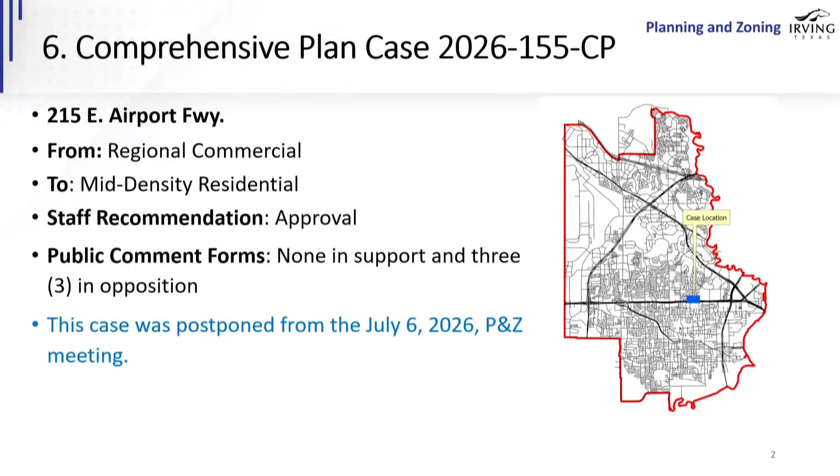So we've done some work and now we're bringing it forward again. This is the subject property, the future land use, which is, like I said, regional commercial currently. The zoning shows multifamily to the north, single family to the west, and commercial to the east. These are the property owners that were notified, and this is the subject property.

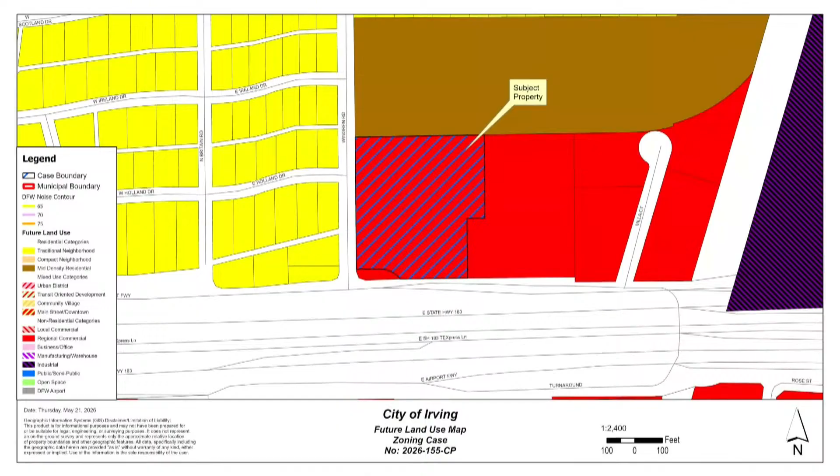And then if you guys are okay, I can go ahead to the 120.

All right, so currently their zoning is SP2 for CC. This was for senior independent living facility, assisted living, nursing home uses, and the State Highway 183 overlay. They're now wanting to rezone it to SP2 for RMF1, the generalized site plan for multifamily residential 1, to allow for low-density multifamily uses, with variances to Chapter 15 for fences, Chapter 33A for setbacks, State Highway 183 overlay for a wall and open space along 183, and section 2 and some of the standards to the 3.13 multifamily development standards.

After review, staff recommendation is for approval. Public comment, same as the comp plan. There was none in support and there were 3 in opposition.

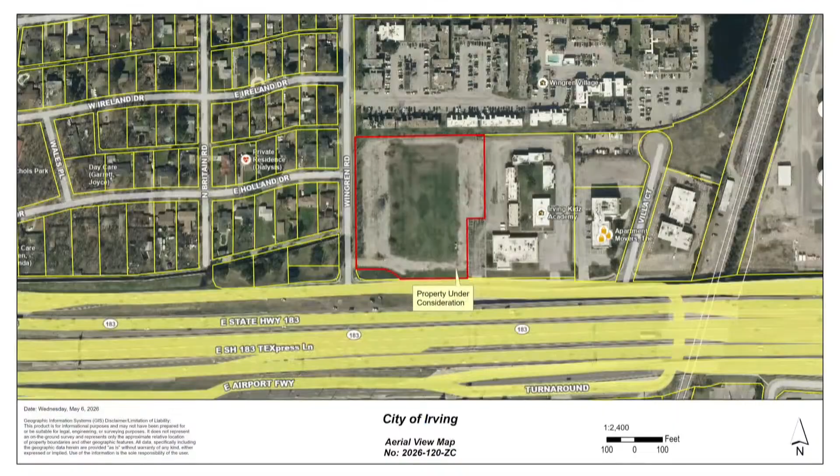Subject property, future land use, zoning, property owners notified. These were the letters of opposition. Most of the concerns - there was one that was about when it wasn't previously notified. There were some concerns about the traffic and congestion. Another one was just about density in general. And the third was about, from the neighbor, about having their easement shown and having access to that easement.

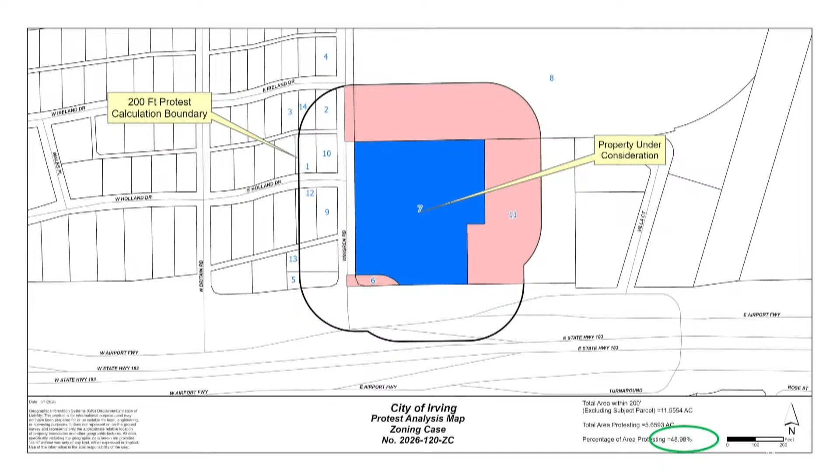Since the last time we were here, there's been a little bit of changes. One is that initially this was kind of just barren, I think initially to be like concrete. We met with the owner and talked about what we'd like to see on the site, trying to get down some of the variances. So they decided to make this kind of a green space area, which inadvertently turned into one of the variances, which I will explain in a minute.

A little bit more green space here. They lengthened their turn-in lane for the stacking that they could have. They lost 2 units, I believe, and they did guest parking here, and then some here, and then some here. They addressed the easement for the neighbor to the east by allowing them to have it here, so they always have access, and it will be gated, but again, they'll have access to their own property.

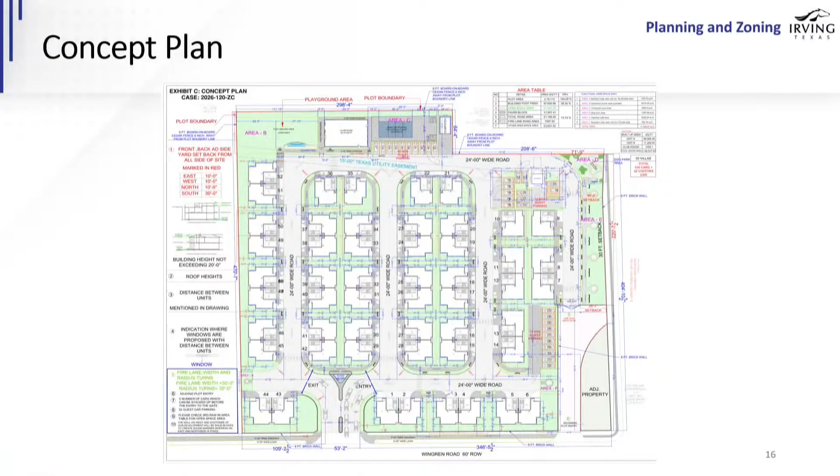And then this is kind of an illustrative Unit A layout. All these are proposed to be 3 bedrooms, 2 stories.

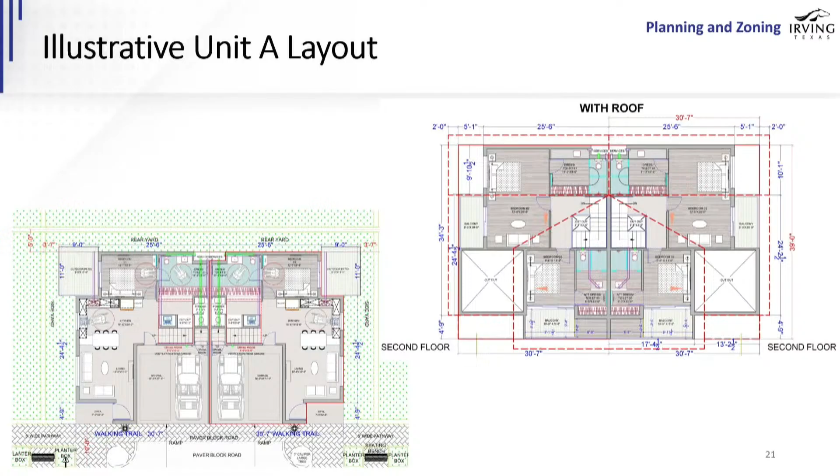And then I can go ahead into the variance requested. Going through the overlay, we realized that 183 isn't mostly for residential. It does talk about high density residential, but not this low density. So that's a use that we're adding to this. That's something that was different from last time.

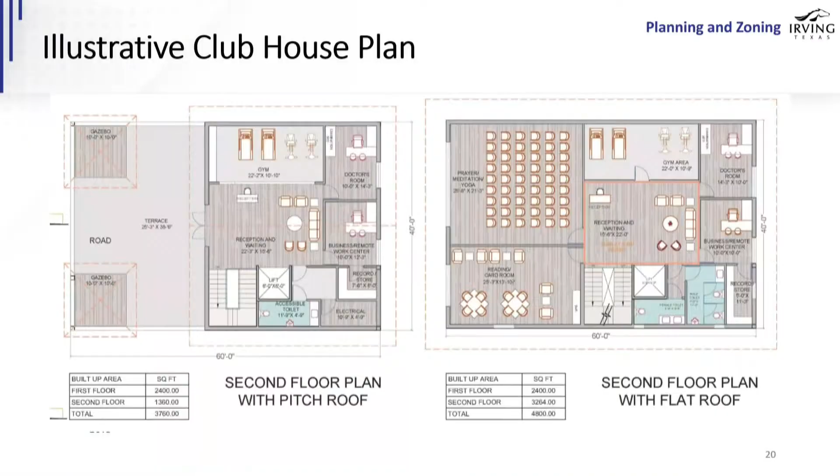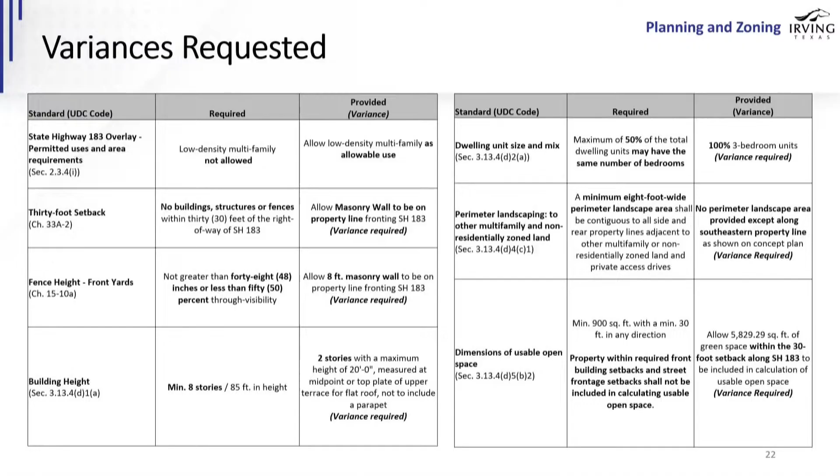Dimensions of usable space, let's see. And then required outdoor amenities, sorry. It looks like they're providing everything besides the swimming pool, the walking trail instead of being more continuous. They are in that buffer that's now to the south of the property that fronts 183. There's a little bit more of an actual sidewalk strip that's landscaped. But besides that, it's just the sidewalks that are in front of the units.

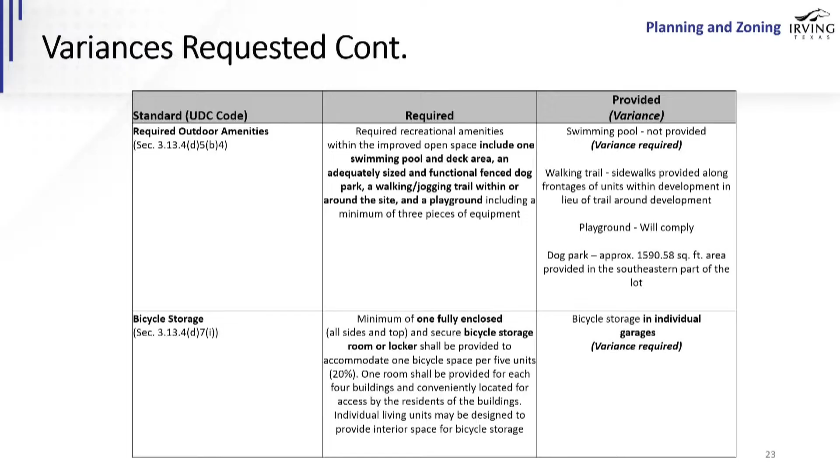They did, from last time, increase the size of the dog park, which is also gated. And then the bicycle storage - they're providing storage inside the actual individual garages, but since it's not necessarily our standard of having a room for so many units and that stuff, it's still a variance.

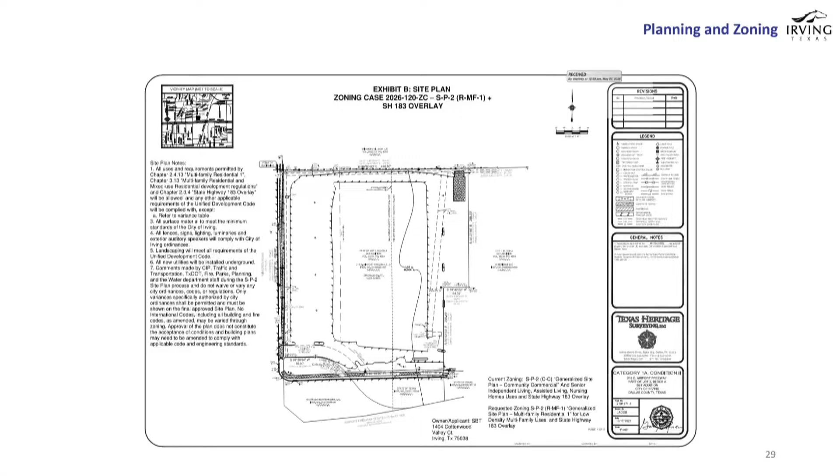Are you all satisfied that you got enough information to really have a firm sense of what the variances are? Yeah, we had them actually quantify in terms of what trees are required, what trees are provided. And that's why we got that list - even though it's still technically long in terms of what variances you usually see per case, it's a lot less than what was initial, and we have concrete numbers now.

You okay with it? Okay. So we've answered all the concerns of the commission basically by your drawing that was at our last meeting, as far as parking, as far as making the variances more visual and understanding what we're changing up. So commission, is everybody pretty much okay with it?

Just want to make super sure. This part right here is the adjoining property and this is their easement to access that. And along Wingren, is that going to be gated? Yes. So it'll be gated on both the east and west ends of that? Yeah, so this is where they're - no, I'm sorry, just on the easement, so who will provide him access when he needs it?

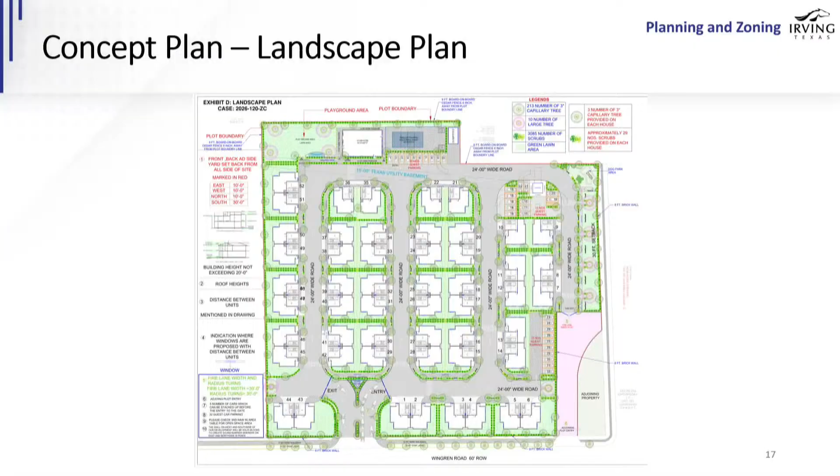So it won't be gated on Wingren because that has to be open. But you can see a little further back it actually says the word fire lane, so it is gated there. That's part of the shared access easement - it cannot be closed off from the other. And there's no landscaping there? No. And there's no building on the actual property that Mr. Kachechian owns - I don't think I said his name properly - no, it's zoned CC, so it's their prerogative to do with it as they choose.

Okay, I'm good, thank you. With the SP2 plan, the generalized site plan, they will have to build it exactly as they're showing here - is that correct? That's what the concept plan shows. The SP2 designation is usually based on acreage, so since it's more than 2 acres, that's why it's an SP2. But with multifamily, we require a concept plan, and that's the enforceable part. So if it's for future redevelopment, they would just have to come back and get a whole new SP2 more than likely? Okay, thank you.

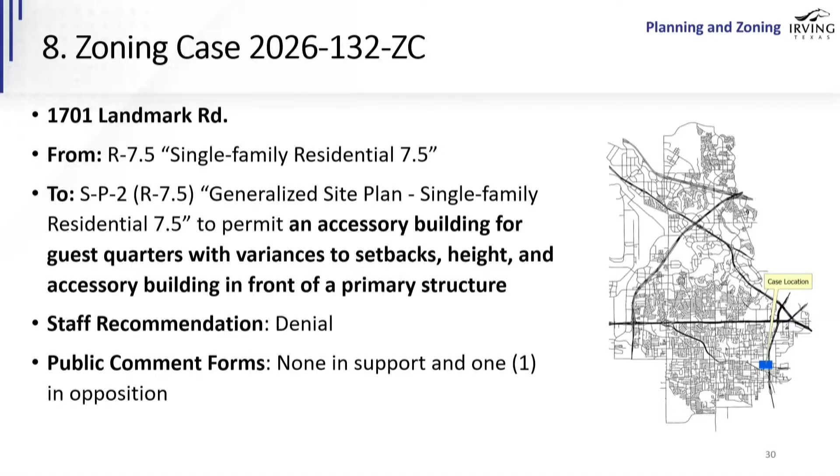All right, so this one is at 1701 Landmark Road. Currently their zoning is R75, single-family residential 7.5. They're going to rezone to the generalized site plan for R75. This is to permit an accessory building for guest quarters, with variances to setbacks, height, and accessory building to be in front of the primary structure. After review, staff recommendation is for denial. In terms of public comments, there's been none in support and one in opposition.

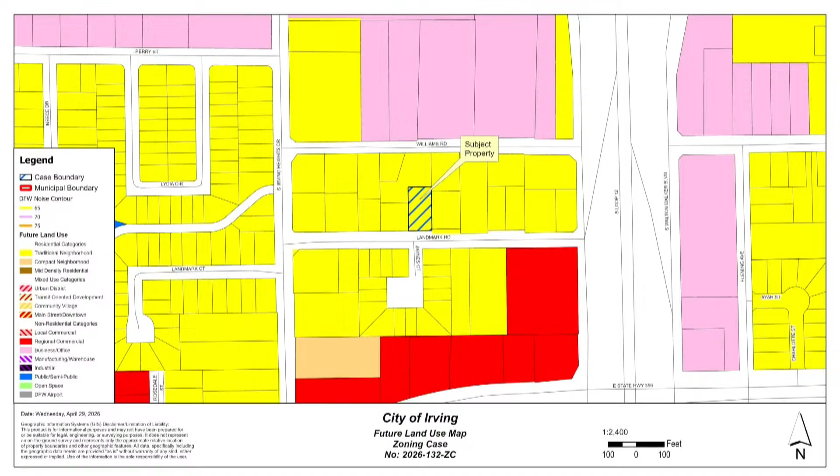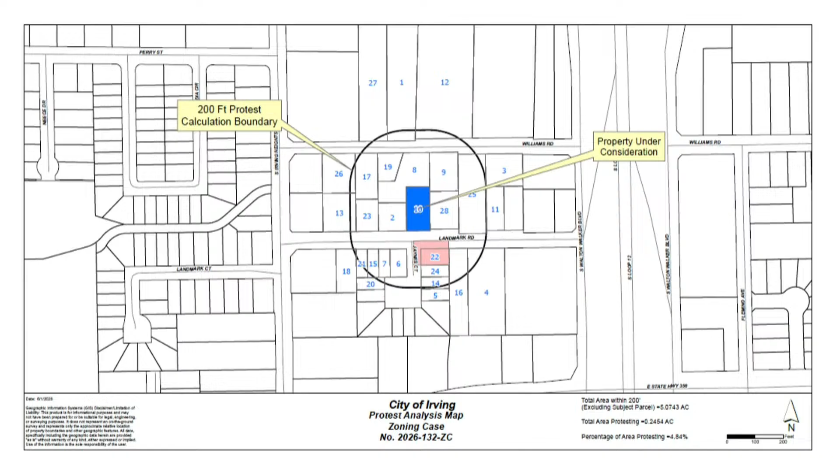So this is the area where it's located. Future land use, which is that traditional neighborhood. Zoning - all around it is single family, but we just have a little bit different designation: some 0 lot lines, some R75, some R6. These are the property owners that were notified, and you can see number 22 is the one that submitted their letter of opposition. Again, it has to do with density, mostly their complaint.

So how this came to be: in May 2025, there was a code enforcement violation for rental of a detached two-story structure. Initially it was a two-car garage converted to be habitable. It was initially under the STR, short-term rental designation. The owner said they weren't doing short-term rentals under 30 days, but longer rentals, so code enforcement closed that case and opened a new one, also in May 2025, for the conversion of the garage to a habitable structure.

It looks like there were no permits for any of the work done. There was a Zillow listing from around 2019 showing it was already two stories, but at that point it seemed to just have a wet bar and an open room, which is allowed for detached garages. But we noticed they got caught because code enforcement found they were listing it on Airbnb. Throughout the cases, it was noted that they should take down the advertisements, but as of at least a week ago, when I did this report, the ads were still active on Airbnb. I can get into some fabulous photos in a minute.

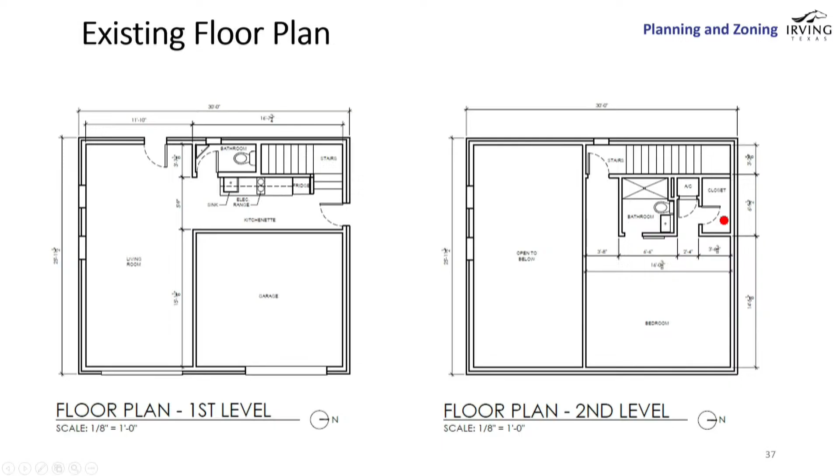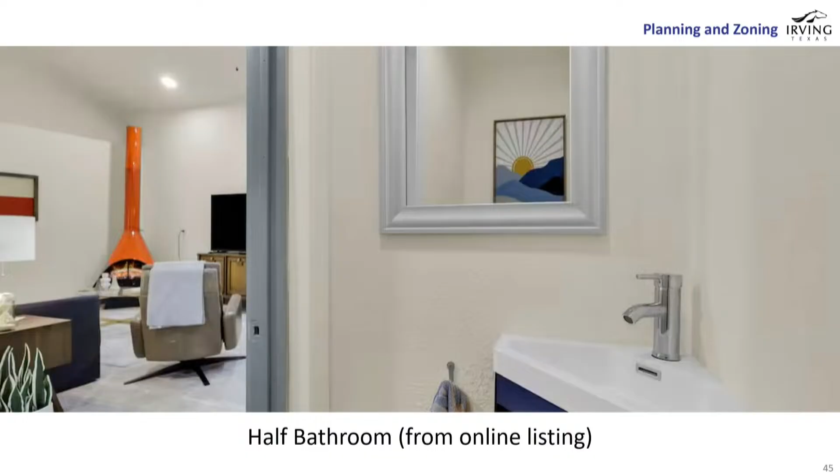So what I'm showing you now is from what you saw on the Airbnb website. You have the living room, and this little dining nook area. This is kind of the half bath—they didn't really have the best photo showing where the toilet is, but it's there. And then this is their kitchen, so you can see it has the refrigerator, microwave, cooktop, and sink. Then you go upstairs, and there's the bedroom. I believe this is the closet, and the bathroom is over here.

And I'm open to any comments or questions.

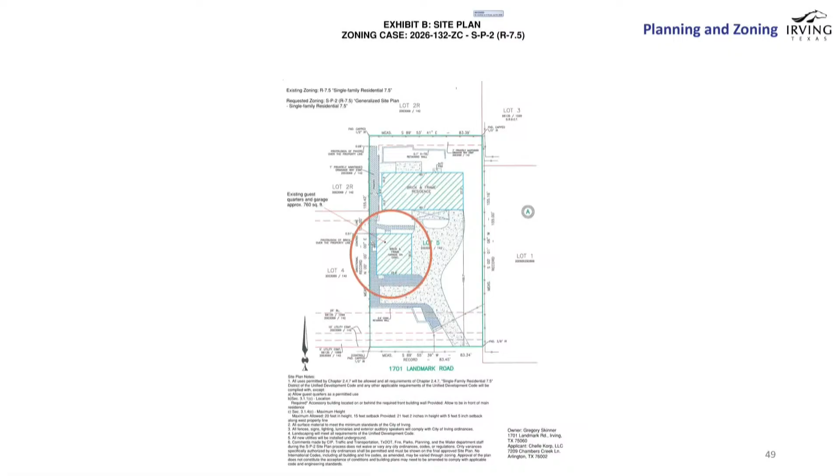If this is denied entirely, what do they have to do? If it's denied entirely, they'll have to take it back to a detached garage. That's not a problem, even though they stopped using it that way. When they built the house in 2004, they did get permitted for a detached garage and the home. Unfortunately, there was no construction plan, so we couldn't see where the intent was, but as far as I could look back, it's been there. So they're still permitted for a detached garage, and that hasn't lapsed.

So they would have to take out everything that's habitable and obviously not have it listed—just the kitchen, or take out all of the restrooms and everything? The dwelling accommodations—for detached garages you can have a loft area, but I believe our code specifies it can't be AC'd. So you'd be taking out the bathrooms, you'd be taking out the kitchen, and you could have the rooms, I believe. At that point, it looks like they converted this, because this used to be a two-car garage.

Do we know when they put this all in? Between 2019 and now—when we looked at the Zillow listing before it was sold, it was just kind of a garage, and upstairs had a loft with wood floors, and it had almost like a wet bar, a sink, and a countertop. So it's been a lot of changes since then.

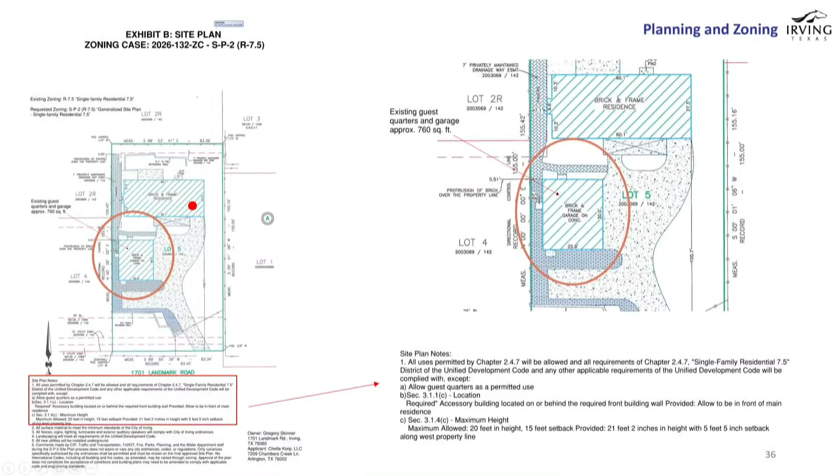Does it mention any problems with people parking on the road? That doesn't seem like a good road to park on. No, there was a fair amount of driveway inside the gate. Yeah, that's the one thing the site does have—they have this drive here, and they could have parking here, they still have a parking space here, and then the actual main house has a garage as well. So you have all this space, but no, it didn't talk about noise or parking or any of that. It just said they didn't want the density.

We will print the opposition for you and have it for the hearing. Great, thanks. So what you were saying earlier is that they want to use it as a guest house, but yet they still have it on Airbnb for rent. Correct. Okay, thank you.

Have you sent it? I haven't sent it. I don't understand how we can allow it as a guest house, even if it's not on Airbnb, when anybody else who's come to us wanting to build a mother-in-law house or suite, it had to be attached to the main building. So why is a guest house permissible without an attachment to the main building?

It's not unusual to have them detached. The difference is it functions kind of like an extension of the home. It's just physically a separate building, but whoever is staying in that building has to be functionally attached to the family. It has to be someone who can come in and go to the kitchen, come in and watch the football game. It has to be someone who is an extension of that family.

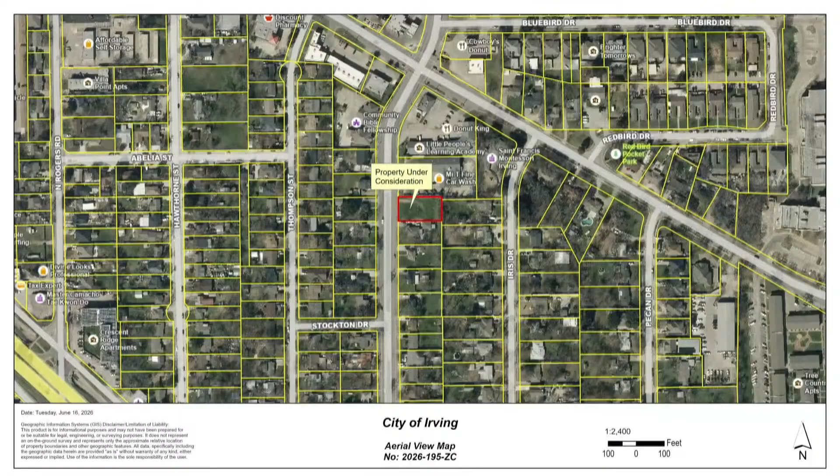2026-195-ZC. Yeah, so this one's on 526 North MacArthur Boulevard. We are requesting indefinite postponement. It seems when, after talking with Carolyn, we initially thought we could take it outside of the site plan and just rezone it since it is on separate lots, separate ownership, but we were told that they need to be part of the rezoning process. We need to amend their site plan for the car wash that's to the north, and this is a subject property, and then their neighbor right here, which is that Mighty Fine car wash.

So when the site plan was originally done, it included this, and there was supposed to be some kind of structure here. Well, anyway, they never built it. They sold it, and now the new owner is wanting to put a duplex on it. But after we talked with Carolyn, it seems like we need to re-notify to include both lots, and also we need an owner authorization form from the owner of Mighty Fine Car Wash to have his site plan amended. So that's why we need to postpone this.

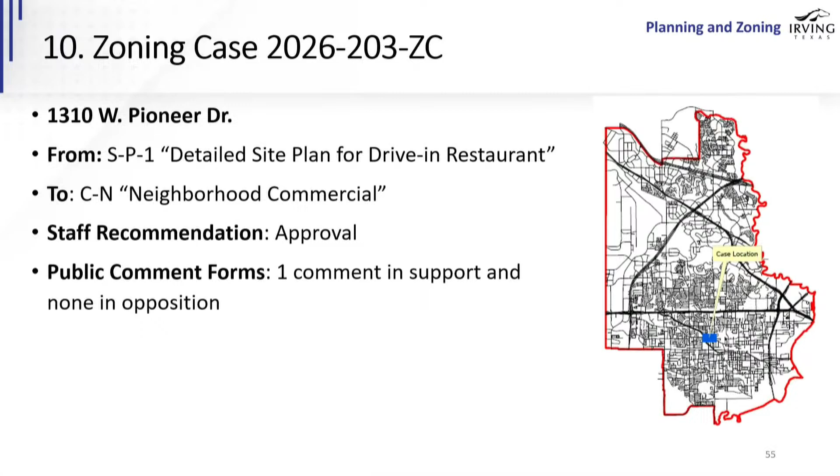So zoning case 2026-203-ZC, 1310 West Pioneer Drive, a zoning request change from SP1, detailed site plan for drive-in restaurant, to commercial, neighborhood commercial. After review, staff recommends approval. And for public comment, 1 in support and none in opposition.

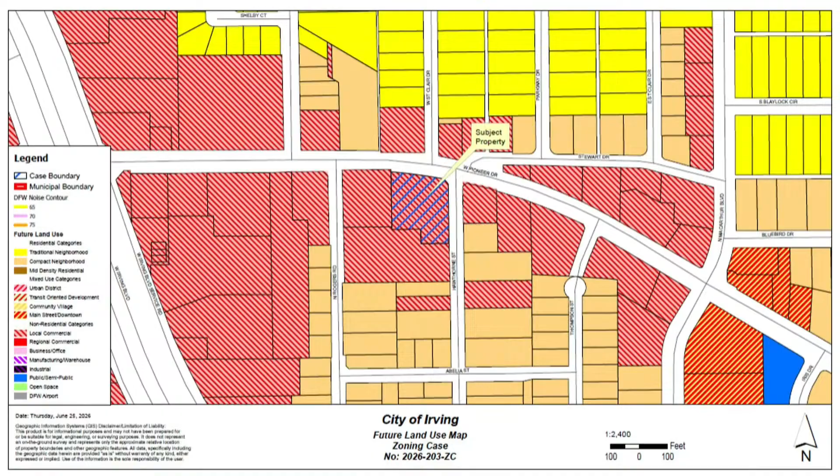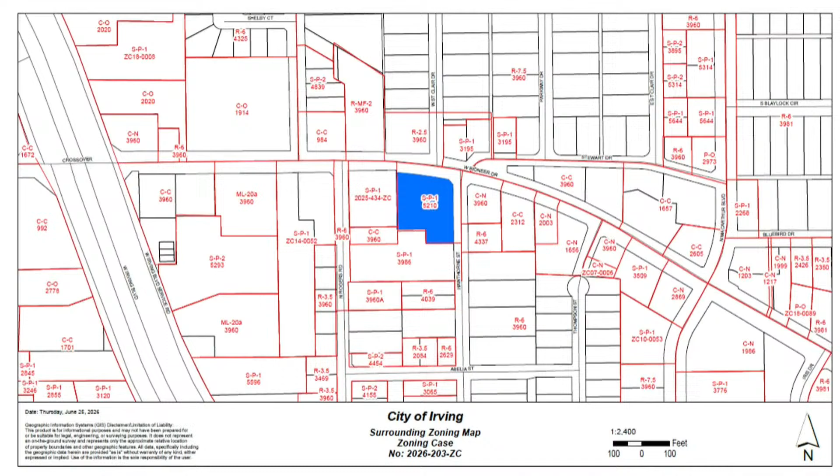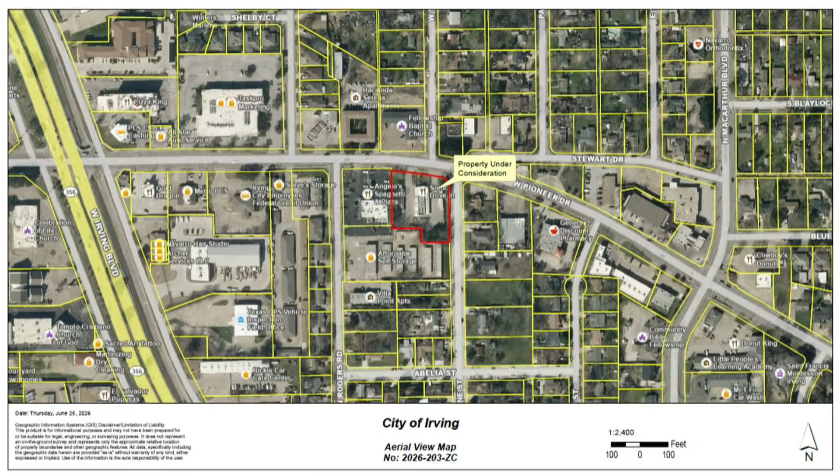Unless another drive-in restaurant were to come into this property, this building will remain vacant. And the applicant does want to convert this space from a drive-in restaurant to a dine-in restaurant, and with the change in zoning, that would allow for this use. And then it already complies with CN regulations for this space, and I also did want to note that we did see that letter of support that really is eager to see change in this property right here. And I'm open to any questions.

It's kind of a full circle moment for us because one of our previous commissioners was the original owner and developer of the Sonic. So it's kind of nice to see that it's moving into something.

I have a question. When I drove around and inspected it yesterday, it is dilapidated, and in the back, all the wiring has been stripped out. Is there enough room? Because before it wasn't a dine-in. Is there enough room inside to really make it an inside diner?

I'm just curious. Well, we didn't receive a site plan or what the restaurant will look like in the future, because there's no requested variances and this is just for a zoning change. But as far as we know, the regulations do support a dine-in restaurant. It's a great improvement from where it stands now, but it's supported.

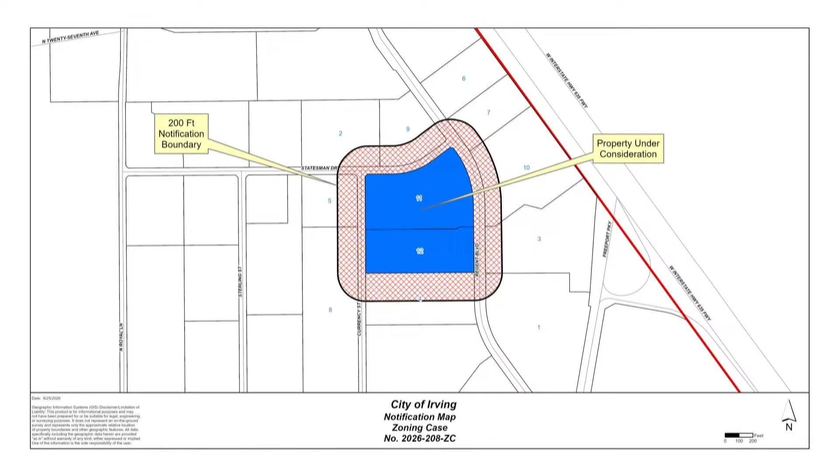A little bit of the history of the future land use of this area. Prior to 2023, it was all lumped together as business district. When reconsidering this area and splitting the definitions from business district to manufacturing warehouse and business office, staff recommended to bring this entire area to manufacturing warehouse. In the end, it was decided to split it up, with manufacturing warehouse to the south and west, and business office taking up the majority of it.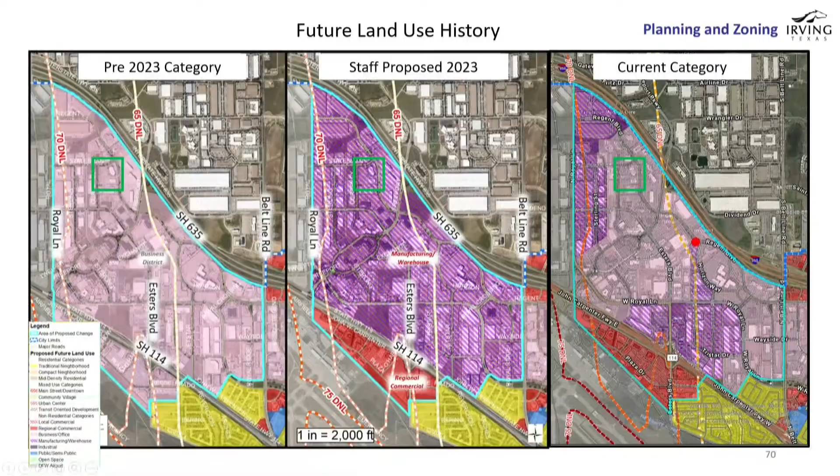And once again, the future land use map. As an additional note, we were informed on July 30th that the property may be under a private deed restriction preventing warehouse and manufacturing use. However, the city does not enforce private deed restrictions, and staff cannot confirm the status of the deed restriction.

Following market-driven trends in the area to redevelop office parks and warehouse distribution facilities, and the existing zoning entitlements of most of the area allowing for these more intense uses, staff supports the requested change to the future land use map to manufacturing warehouse.

On to more of the zoning aspect of it. Once again, going from commercial office and ML20A to just ML20A, we recommend approval, and there are no comments in support or opposition.

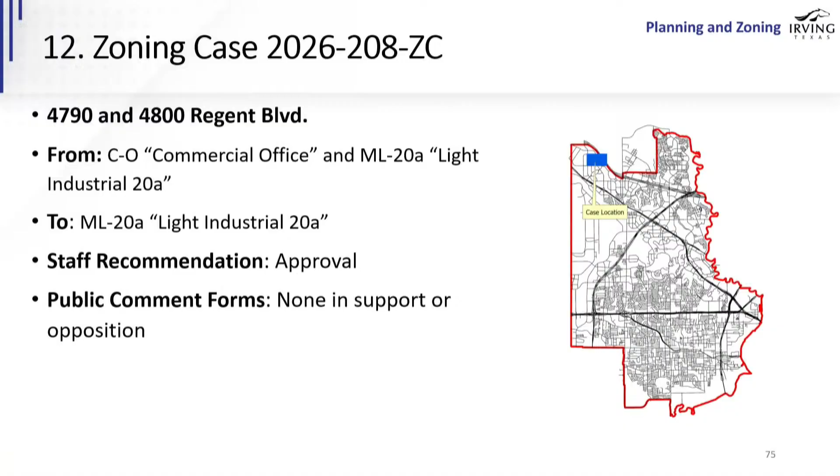The property to the north has a two-story office building on it currently that was built in 1993. The southern property has a two-story office building built in 2008. In the applicant's letter of intent, they wish to preserve the current office uses while allowing for the potential for light warehouse and light industrial uses.

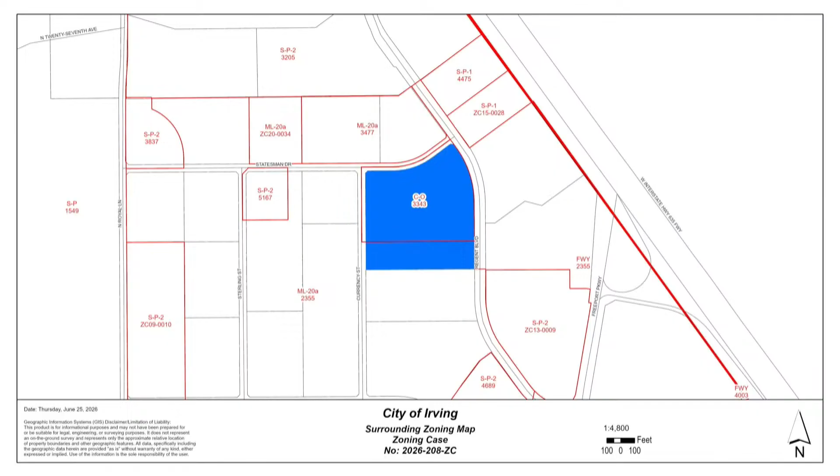Future land use map again. Current zoning again. Notification map. Surrounding zoning of the larger area. Breakdowns of CO and ML20A.

Here we have the northern parcel, 4800 Regent, from across Regent Boulevard, and the other side of the property from the parking lot. Here we have the southern property, 4790 Regent Boulevard. Across the street to the north, to the east, to the south, to the west, and back to the aerial view.

Many of the surrounding properties have zoning entitlements for freeway and ML20A, and over the last several decades have become a mix of low-rise office parks with some warehouse distribution and light industrial uses. Perhaps due to the proximity to DFW Airport and changes in the office market, the city has received inquiries regarding changes to properties, and permits for demolition and construction of warehouse and light industrial properties have been submitted. The existing freeway and ML20A districts do allow these by rights.

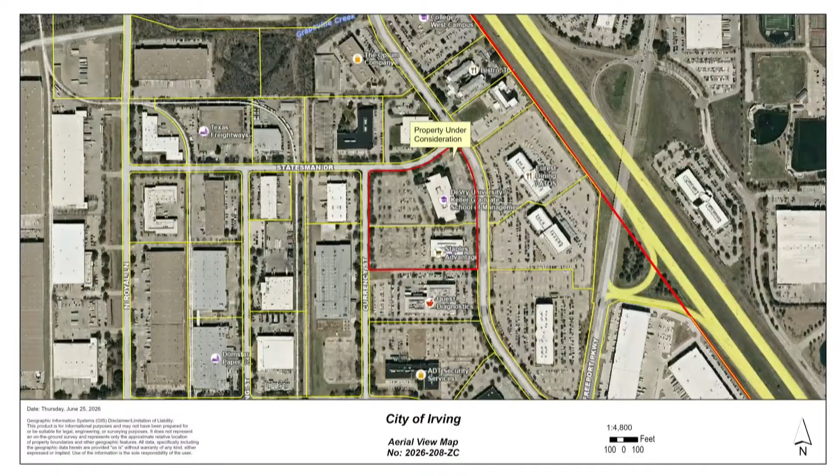The property remains zoned CO commercial office in the center of an area where surrounding properties can redevelop with no rezoning processes or considerations necessary by the city. This creates an inconsistency for the potential of the properties to develop in the same future pattern that other properties currently enjoy. Considering that the sole property remains zoned for offices in an area where current zoning entitlements allow for light industrial uses, and the consistency of the area and compatibility of adjacent land uses, staff supports the requested zoning change. Any questions?

Is this going to be sort of a flex warehouse type application, or what kind of development are we talking about? I believe the southern property has one company in their office building that is hoping to develop a warehouse nearby, so it would be a joint operation.

Right now, the owner intends to keep the buildings. They just want to change the entitlement to give them options in the future. So there's no plan at the moment.

So right now, are they wanting to keep basically the same facade and maybe open up the back for storage, or are they wanting to tear down? Are we going to have metal buildings there, or a tilt wall flex warehouse?

We were told there's no plans for the northern property at this time. It will stay as an office building. There's a tenant in there. I think they recently purchased it, so they just wanted to have the same entitlements that the properties around them have. But they don't have any plans, nor a schedule. They just want the ability to do it if they have a user.

I don't see an issue with having a flex warehouse there or whatever. My concern is that the tenant moves out of the top building and they go to the back and build a big metal building. It's really inconsistent with what's around.

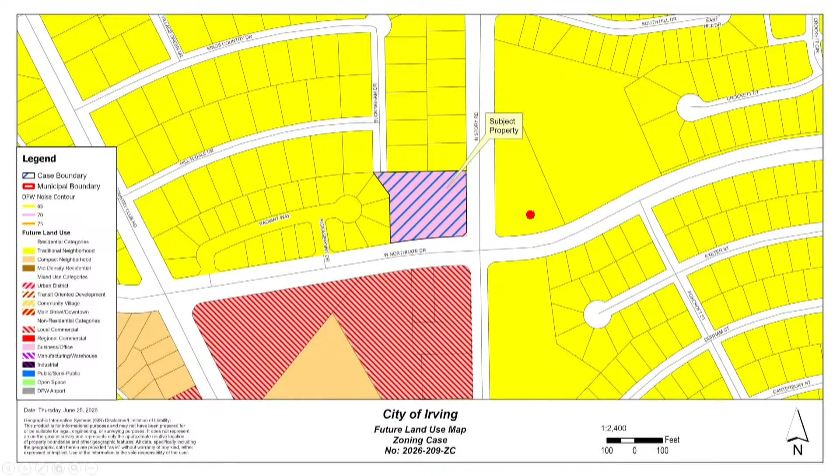It is located at the corner of West Northgate and North Story Road. The current SP2 allows for the PO uses within the subject property and then R6 in this undeveloped area over here. The future land use is business office on the subject property and traditional neighborhood to the west, surrounded by other traditional neighborhood to the east and local commercial to the south.

Current zoning, notification map. This is the subject property across from West Northgate, looking down from North Story Road. This is to the north, to the east, and to the south. And this is down to the west where the rest of the undeveloped residential is.

Also in the site plan is a request, the original site plan, for a front setback variance, which would not be needed with the requested rezoning. In the applicant's letter of intent, they state that the owners want to construct a building for neighborhood-serving commercial uses such as retail, professional services, and a small restaurant.

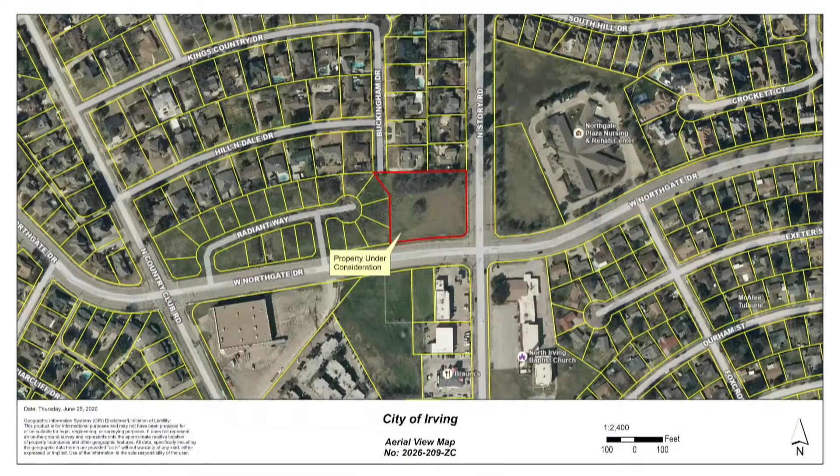Given that CN is a compatible district in the business office future land use, and that the site's location is at the intersection of two arterial roads and adjacent to CC community commercial zoning to the south, with non-residential uses to the east, staff can support this request. Any questions?

Looking at the map there, on Story Road, for the small businesses like a restaurant they've requested, that slope is so dramatic I can't imagine anything you can put in there. I didn't know from what I read and saw if they were going to build to the west, down in the small area, or if you're talking about the corner there. I guess that's a question we'll have to ask them. Yeah, I'm not sure that we've received building permits for it.

Anyone else have any questions on that? Any other questions? Doesn't appear to be. Tanner, thank you.

And you have the final case tonight. 2026-211 SFP. Yes, we're looking at a special fence plan request at 614 Lexington Drive. The current zoning is R7.5, and the request is for an 8-foot tall solid wood fence within the 15-foot side yard setback of a reverse frontage lot.

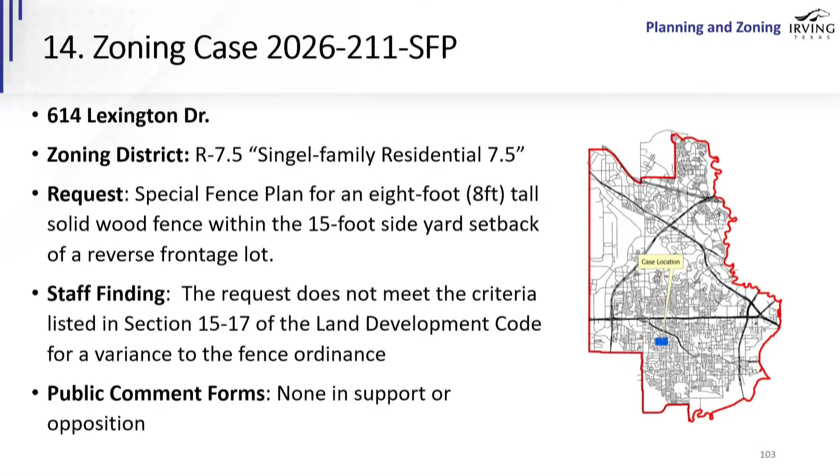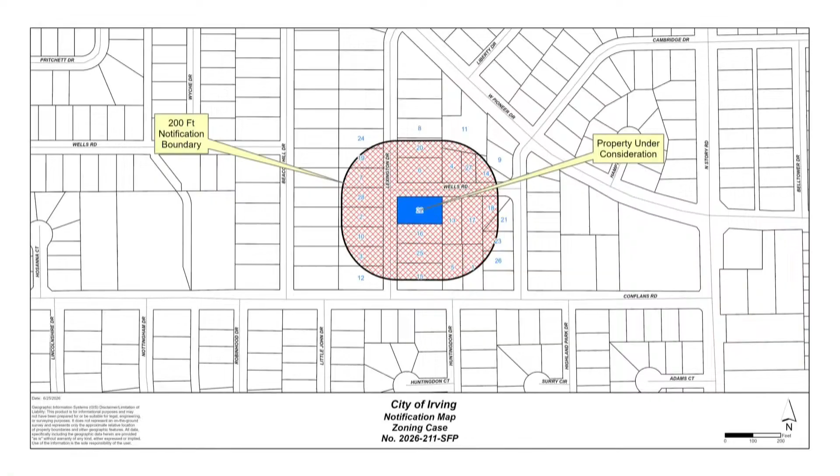For SFP cases, there are certain criteria to be met, and we have found that they do not meet that. There are no comments in support or opposition at this time. Here we have the subject property at the corner of Lexington and Wells. Future land use map is all traditional neighborhood. Current zoning, notification map.

And here we have the site plan. Right here is where we're looking at the variance, being a reverse frontage lot where the neighboring property faces out to the east here, or sorry, to the north here. They would be required to observe a 15-foot build line for their fence from the property, but they are requesting a 4-foot build line, so a variance of 11 feet.

These are the criteria for an SFP. Here's the subject property along Lexington Drive, the frontage of the property. Here's along Lexington, this is the fence to be replaced. Their neighbor to the east, that is abutting where the new fence will be. South of the subject property, and back to the site plan. Questions?

Question for traffic. We've had this scenario before come before P and Z, and what we did on the back of the property is cut a 15-foot by 15-foot angle on the corner so the neighbor would have visual sight. Is there any issue with basically doing the exact same thing, and will there be any issues with traffic if that fence is put up?

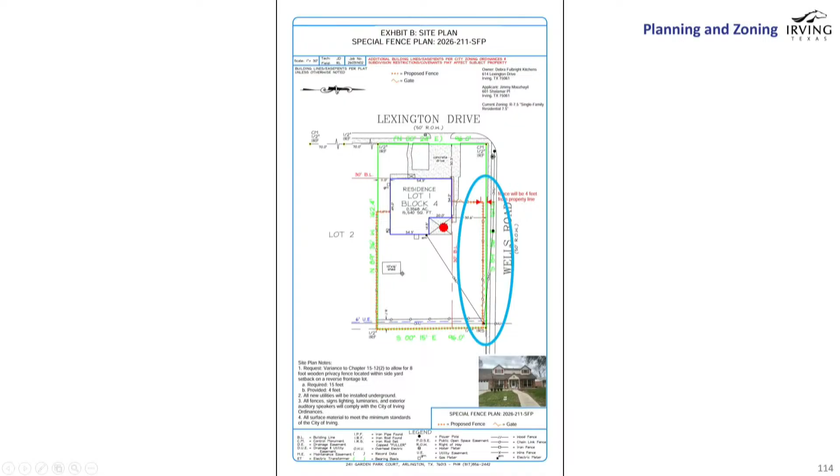Any other questions? Jocelyn, can you remind us why special fence plans don't require the big yellow zoning change sign, and do neighbors get notified of these? We do mail notices, yeah. They're variances essentially, but by ordinance they go through P and Z and council. Like Board of Adjustment cases, typical variances don't have the full signage and don't have newspaper notification, but they do have the mailed notification. So this is consistent with a variance.

Should it be the same? The signage requirement, at least per state law, is for zoning changes, which is land use. Got it. So no, state doesn't see it the same.

Okay, does anybody have any questions about any of the cases that have been presented tonight? Anybody have future agenda items for meetings?